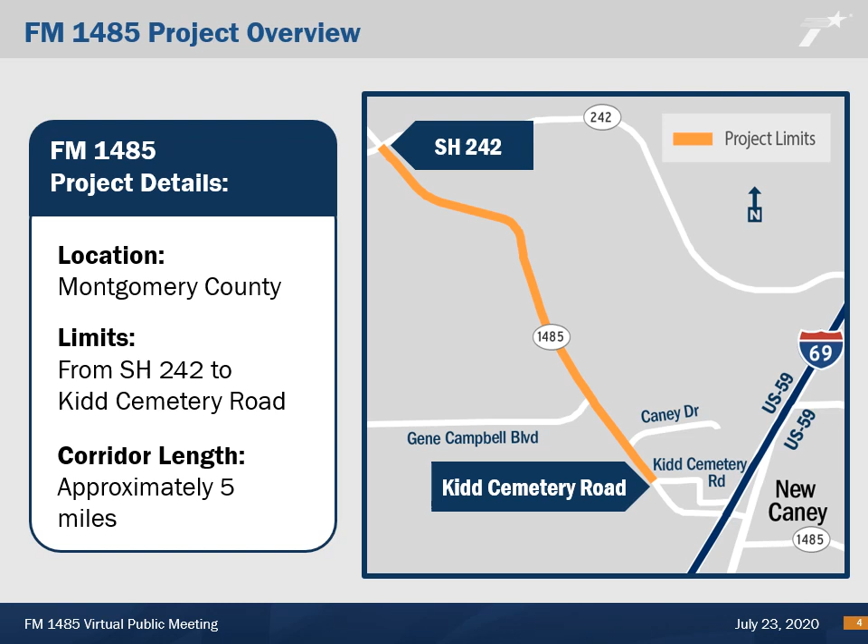TxDOT is analyzing options to improve mobility and accommodate current and future traffic volumes along this area of FM 1485. The project limits extend along FM 1485 from SH 242 to Kidd Cemetery Road for a length of approximately 5 miles. The project is located in the city of New Caney within Montgomery County.

The existing FM 1485 in the project area provides one 12-foot travel lane in each direction, 8-foot shoulders, and open ditches on either side of the roadway. There is no center median or turn lane. All of this is contained within an average right-of-way width of 100 feet.

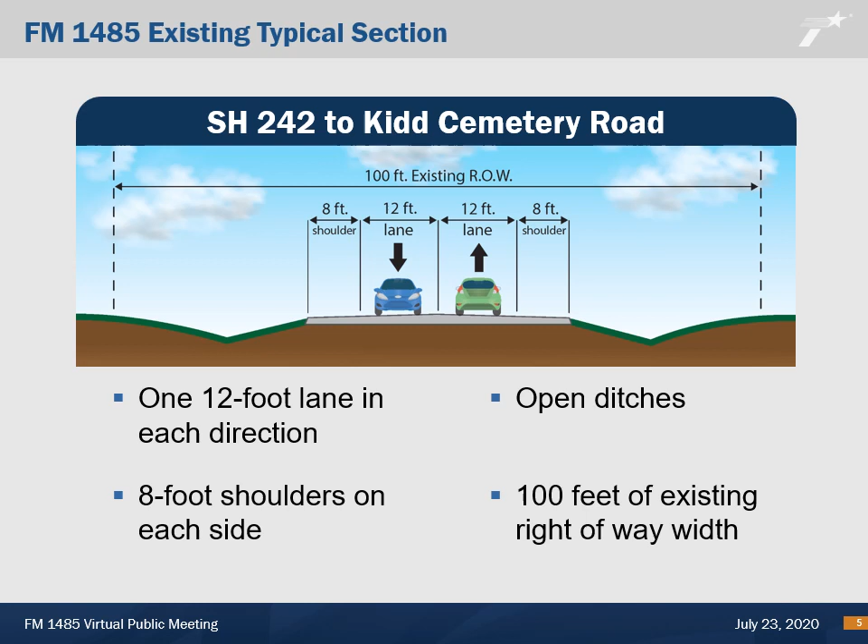The proposed project is being developed because the existing FM 1485 roadway between SH 242 and Kidd Cemetery Road does not accommodate current and future traffic volumes. This has resulted in congestion and reduced mobility. The purpose of the proposed project would be to improve mobility and to accommodate current and future traffic volumes along the segment of FM 1485 extending from SH 242 to Kidd Cemetery Road.

The population of Montgomery County has increased dramatically over the years, and we anticipate this trend to continue. Recording just over 522,000 residents in 2015, Montgomery County is expected to more than double that number before the year 2045, with a projected population exceeding 1.2 million. That means more residents traveling to and from their homes in Montgomery County every day.

Additionally, the number of jobs in Montgomery County is expected to grow significantly, from just over 204,000 in 2015 to more than 319,000 projected jobs in 2045. Pairing this with our population projections, we can not only predict that an increased number of residents will be utilizing our transportation system in the coming decades, but also that a large number of commuters will be traveling to work within Montgomery County on a daily basis.

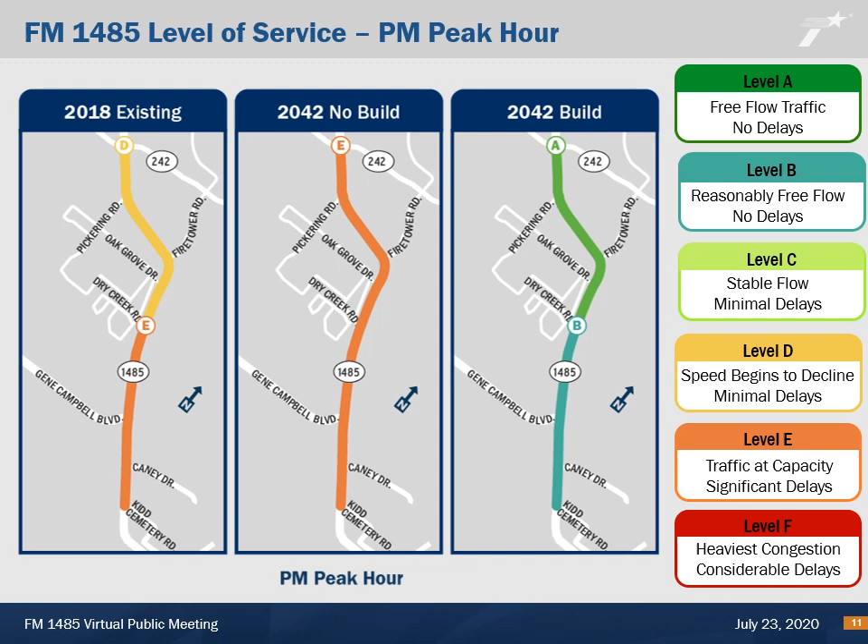TxDOT collects information about crashes occurring throughout the state. The average crash rate along this section of FM 1485 between 2015 and 2018 was 214.26 crashes per 100 million vehicles. The statewide crash average for rural roadways during the same time period was 110.71 crashes per 100 million vehicles. Comparing these numbers, we see that FM 1485 in the project area has almost twice the number of average crashes as other rural roadways in Texas.

To provide safer and more reliable travel along FM 1485, TxDOT proposes to widen the roadway from 2 lanes to 4 lanes and would separate opposing lanes of traffic with the addition of a median down the center of the roadway with multiple left turn lanes and U-turns throughout. This project also proposes continuous 10-foot side paths on both sides of the street to more safely accommodate pedestrians and cyclists.

TxDOT has developed two proposed typical sections for FM 1485 based on identified needs for the corridor. Throughout the entirety of the project area, FM 1485 would gain an additional travel lane in each direction and side paths on both sides of the roadway. The difference between the two typical sections is one would have a raised median and the other would have a continuous center turn lane.

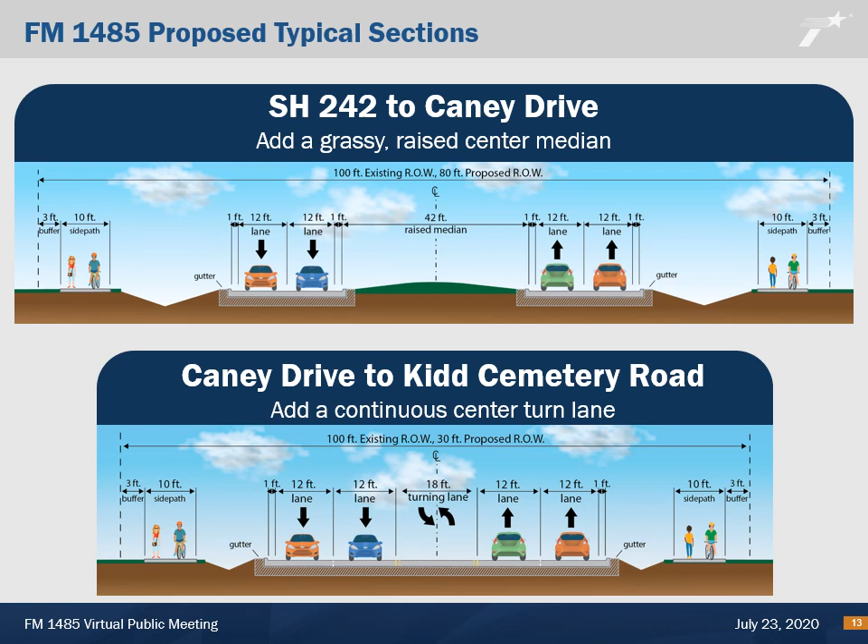As shown in the graphic, the proposed design for the north end of FM 1485 from SH 242 to Caney Drive includes two 12-foot lanes and a 10-foot side path for pedestrians and cyclists in each direction, curb and gutter drainage, and a 42-foot grassy raised median to separate the two directions of travel. The current TxDOT right-of-way in this section is 100 feet wide. This project would propose acquiring an additional 80 feet of right-of-way width in this section to fit these improvements.

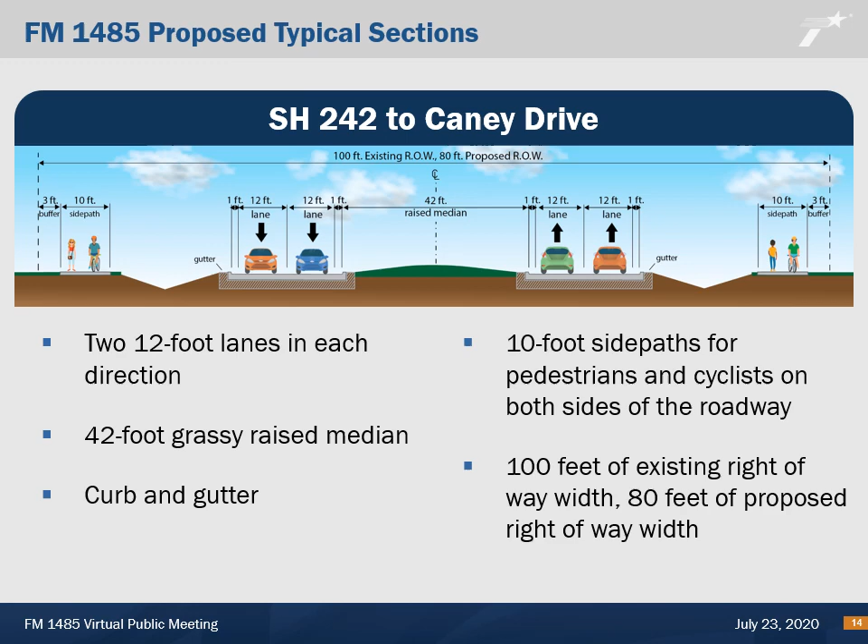Like the section north of Caney Drive, the proposed design for the south end of FM 1485 from Caney Drive to Kidd Cemetery Road would also include two 12-foot lanes in each direction, 10-foot side paths for pedestrians and cyclists, and curb and gutter drainage. However, unlike the northern section of the roadway, this section would include a continuous 18-foot center turn lane to separate the opposing travel lanes.

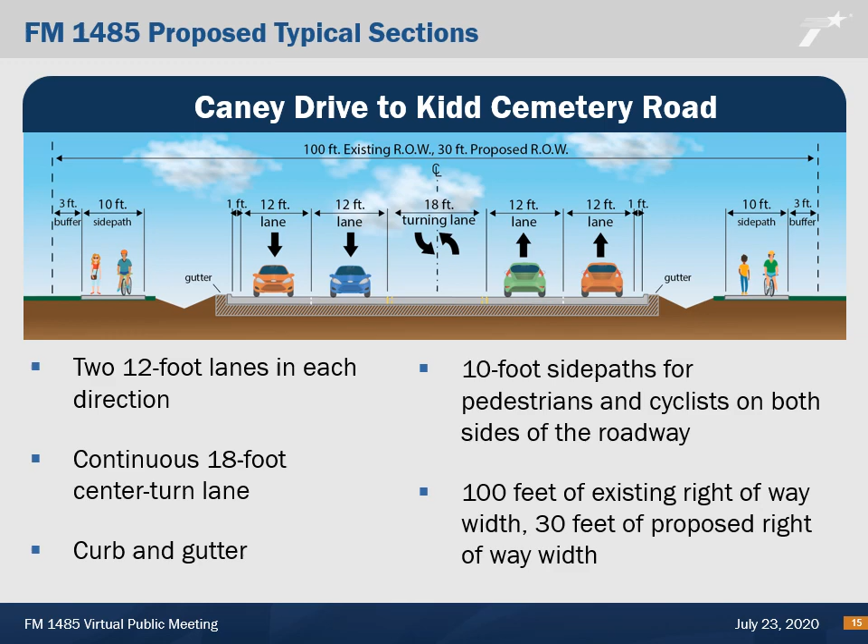The current TxDOT right-of-way in this section is also 100 feet wide. This project would propose acquiring an additional 30 feet of right-of-way width to fit these improvements. The engineering team has developed a proposed schematic to meet the project purpose and need while minimizing the additional right-of-way needed, displacements of homes and businesses, and impacts to private property.

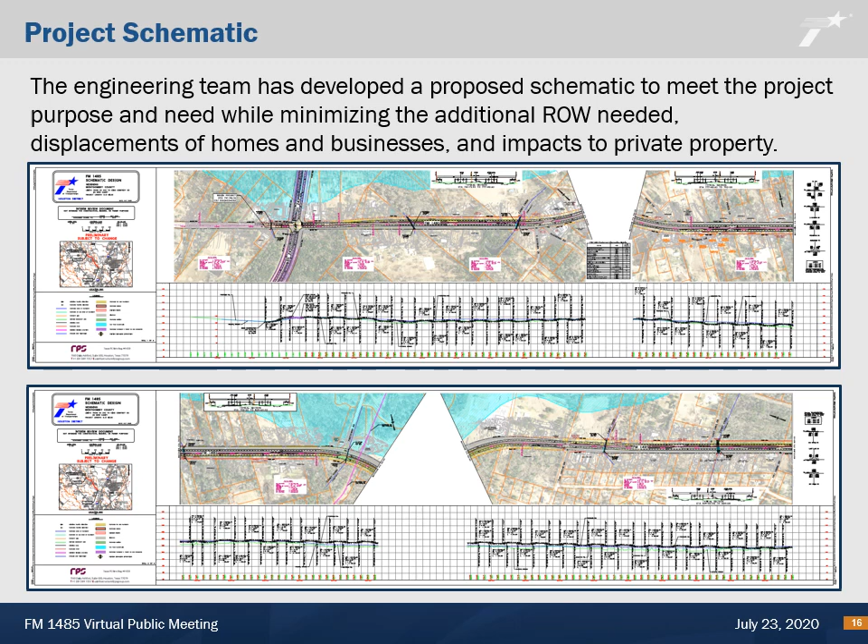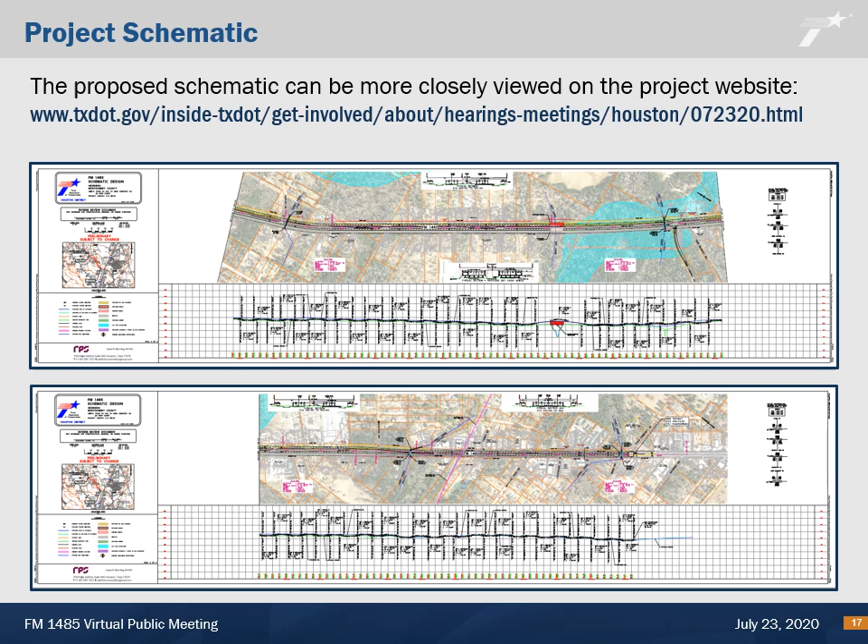We are showing a high-level overview of the schematic and have included a large PDF of the schematic on the project website. The engineering team has broken the proposed schematic into 4 pages to show more detail about the proposed improvements. If you'd like to take a closer look at a specific area, you can download the schematic and zoom in on your locations of interest.

In order to construct the proposed improvements, TxDOT would need to acquire approximately 46 acres of additional right-of-way. This could result in displacements of up to 40 properties, including 14 residences or associated buildings such as garages, 17 commercial properties, and 9 properties that fall into other categories or whose use is unknown.

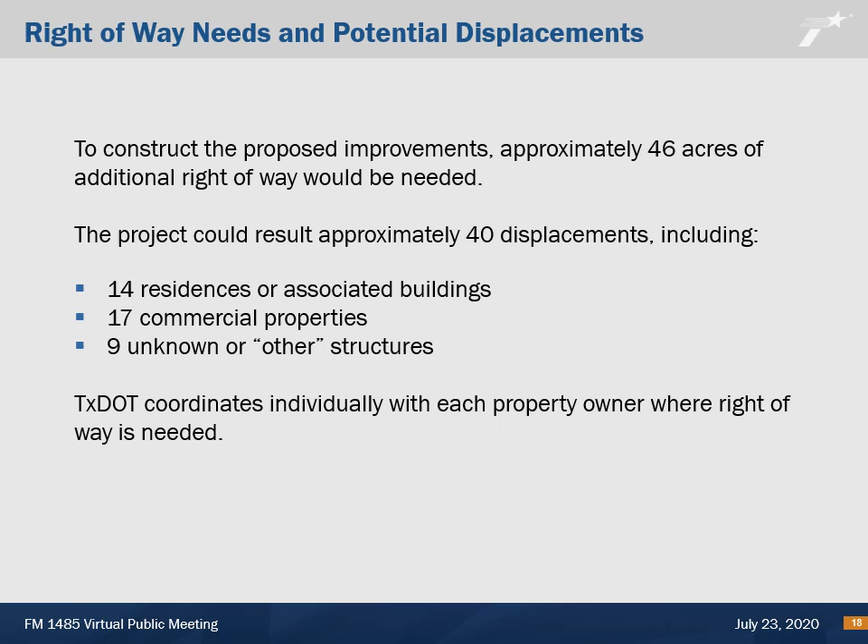TxDOT coordinates individually with each property owner where additional right-of-way would be needed. There are several steps in developing this proposed project before construction could begin. TxDOT began the project development process by reviewing current conditions and constraints that exist in the project corridor. The project team collected data and evaluated preliminary alternatives to develop the proposed project being presented.

As part of this virtual public meeting, we are collecting feedback from the community and will use that feedback in conjunction with additional technical evaluations to refine the proposed plans into a preferred alternative by mid-2021. At that point, TxDOT would then hold a formal public hearing to gather input to help further refine the preferred alternative.

Environmental clearance is anticipated in late 2021. Once clearance is received, TxDOT would begin negotiations with property owners to purchase the additional necessary right-of-way. The engineers would then develop final plans used for construction bidding, and TxDOT would put the project out for construction bids. We anticipate this process to move forward over the next 2 years and to begin construction in late 2022.

The current estimate for construction is $67 million. Both federal and state funds are anticipated for this project. However, funding has not yet been allocated for construction.